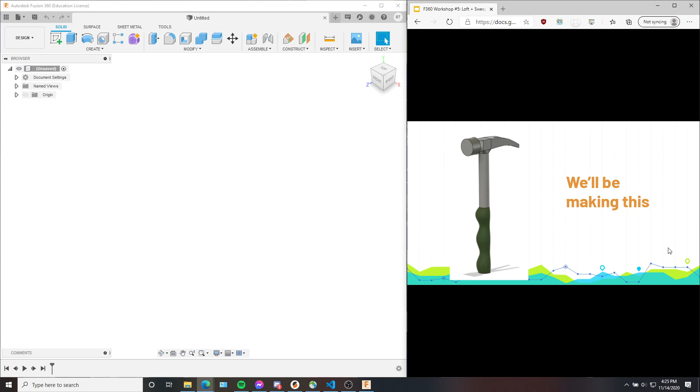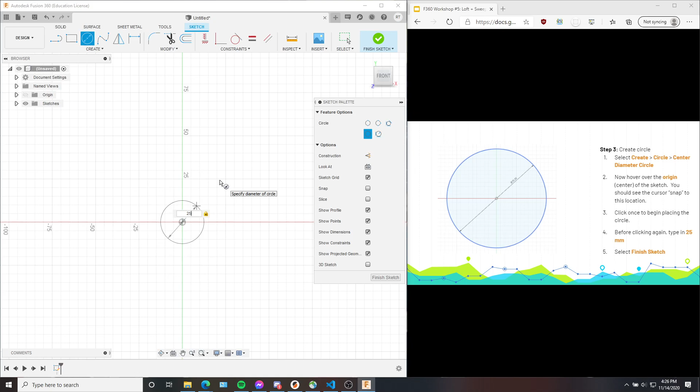Here are the slides. We'll be making this hammer. First we'll create a sketch and put it on the XY plane, then create a 25 millimeter long circle. After that, finish sketch, then extrude and set it to 15 millimeters.

Next we're going to create an offset plane. An offset plane is basically a plane away from a face at a certain distance. We'll click offset plane, click on this back circle profile, extend it by 10 millimeters, and click enter.

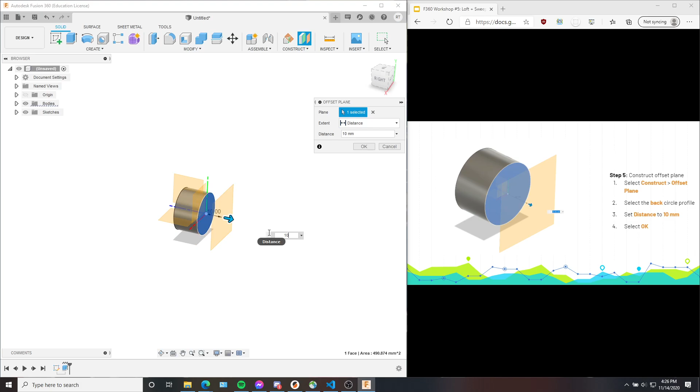Afterwards, we want to draw on this plane, so we do create sketch and click on the plane. This redirects our viewing point so we're drawing on this plane. Now if I zoom in, we'll use create and a rectangle to create a center rectangle, then click on the sketch origin to stretch it out.

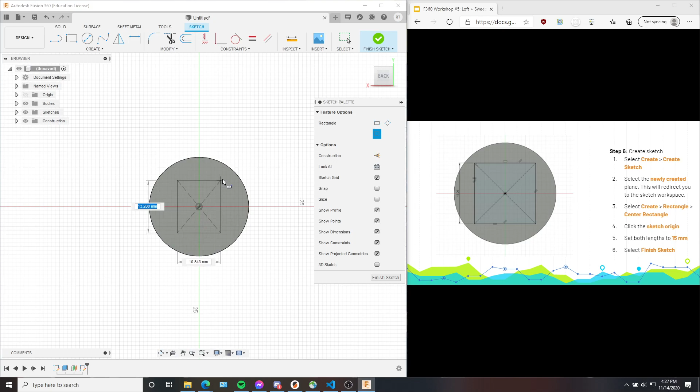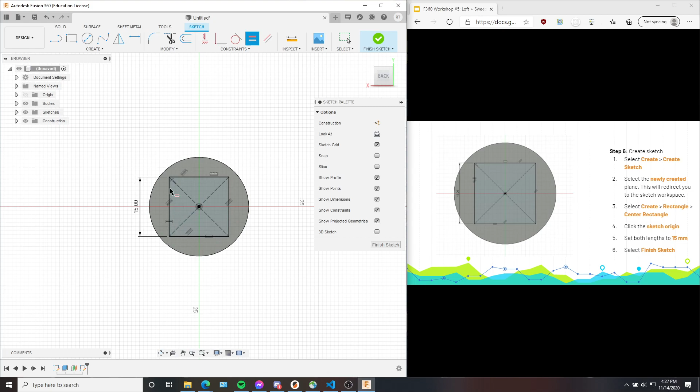We click enter, then relabel these dimensions. This will be 15 millimeters long, and I also want this to be a square, so I'll make this edge and this bottom edge equal. Now it's all constrained, so we can finish sketch.

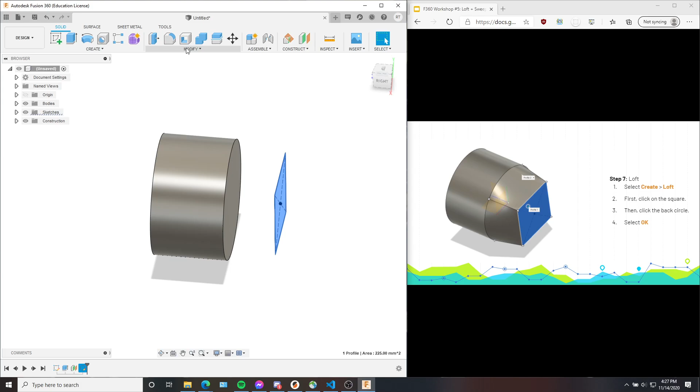Afterwards, we're going to use this new tool called a loft. A loft allows us to merge two profiles together into one surface. It's really useful when you're trying to combine different surfaces into one object smoothly, instead of having this weird riggedness.

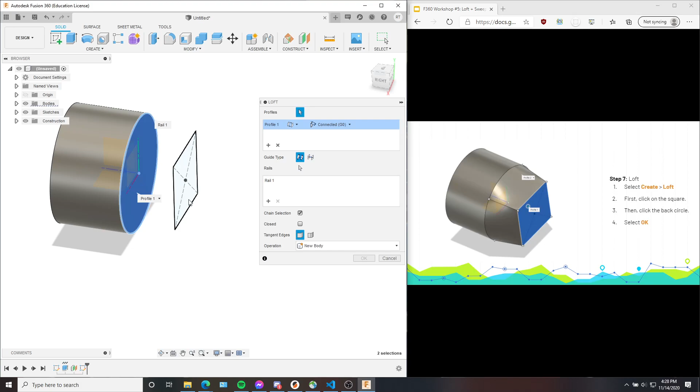So we go to create loft, and the first profile I'll click is the circle, and the second profile I'll click is the square. We do not need rails. So now over here, we have this circle merging into this square, and we don't need to worry about the rails right now.

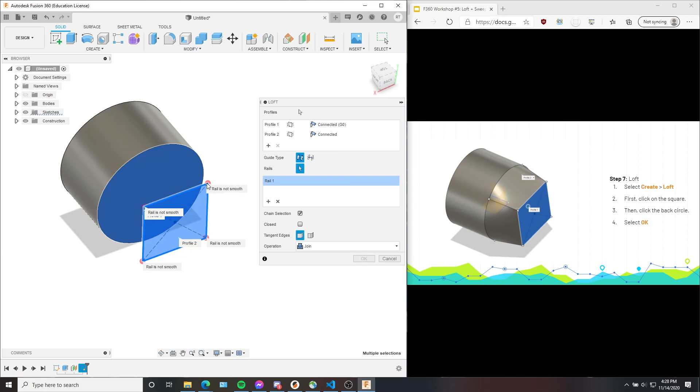Just know that if you did want to change these edges, you can shift these about. Whoops, don't need these. Center. Yeah, you should be able to. Let's just not worry about that right now. But regardless, you can merge two profiles into this one cool surface.

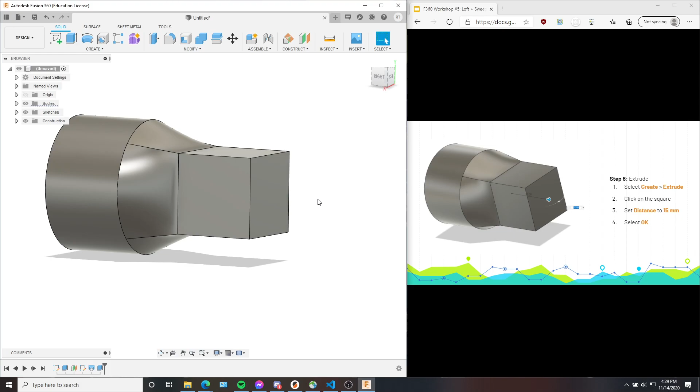Click OK. Now we want to extrude this square edge. We click extrude and do it by 15 millimeters, and we're okay. So now we want to create another offset plane.

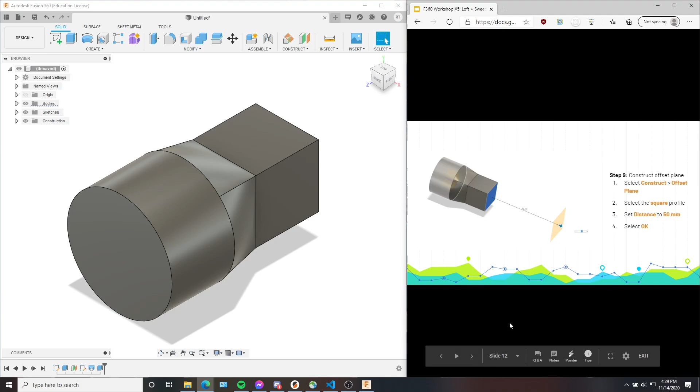This is so that when we're working on the hammer, we can work on this back face and then create a loft. So going back, we do offset plane, click on the back, set the distance to 50 millimeters, click enter. Now we have this plane back here.

Next we want to draw on this plane, so we click create sketch, click on the plane. The way it's oriented right now, I want to look at it from the back, so I'm going to rotate this so it goes to the back, like so.

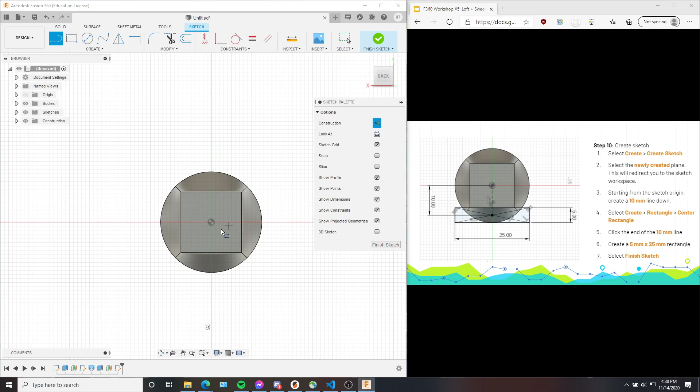Then I want to create a construction line, because this 10 millimeter long line here is not going to be used for any extrusions. So I'll click L, make it 10, click enter.

Now this rectangle profile, I want this to be part of an extrusion, or part of a loft. So if you're going to use it for a feature, you can't have the construction option on, so we're going to turn it off.

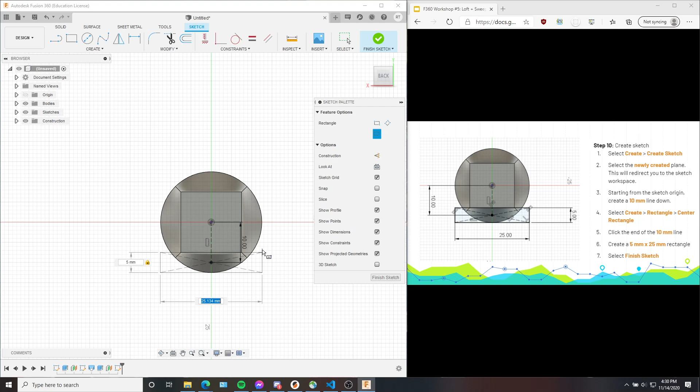Then we're going to create a center rectangle, click over here. Now we're going to set the dimensions: the height to 5 and the width to 25. Click enter, and now we can just do finish sketch.

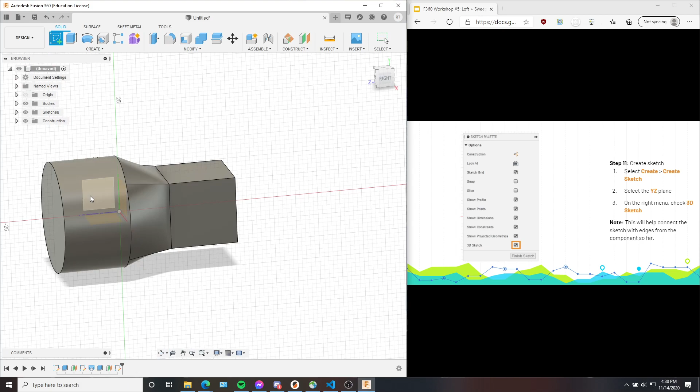Now we're going to create another sketch. To do this, we're going to click create sketch, and then we're going to do it on the YZ plane so that it cuts the hammer in half. So click here.

Next what we're going to do is turn on 3D sketch. The reason why we're turning it on is because we want to be able to use these edges. However, if I try to draw right now, I can show as a demonstration, it doesn't really line up because it doesn't really know that it's there.

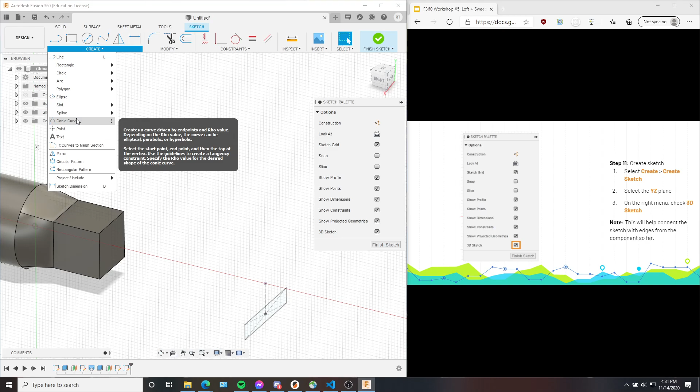So what we're going to do is click 3D sketch, and then use the conic curve, and then I'm going to try to line this up so that it hits the midpoint over here, so it will have like an X.

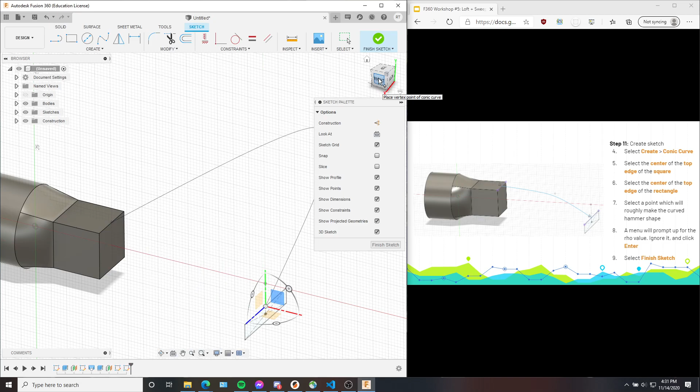Next I'll do it on this rectangle up here on the top edge. And now this part is making a curve, so to make the curve right, I'm going to go back to a correct viewpoint, and then place it roughly around here. There's not really a certain place you have to put this on. As long as it just makes the general hammer shape, you're all good.

Now we can change the rho value. What this does is change the sharpness of this curve. If I make it 99, it's almost just 2 lines, whereas if I make it 1 or 0, it's almost a straight line. I'm going to bring it back to 75, click enter, and now we don't need this 3D sketch anymore, so I'm just going to turn it off, and we can do finish sketch.

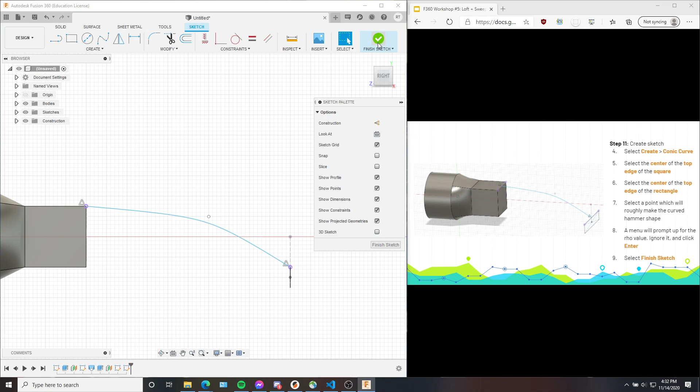Now what we're going to do is create a loft. So we click create and then loft. For the profiles, I'm going to click on this square and this rectangle. Right now you can see the loft it's trying to make is just directly a straight line. We don't necessarily want that.

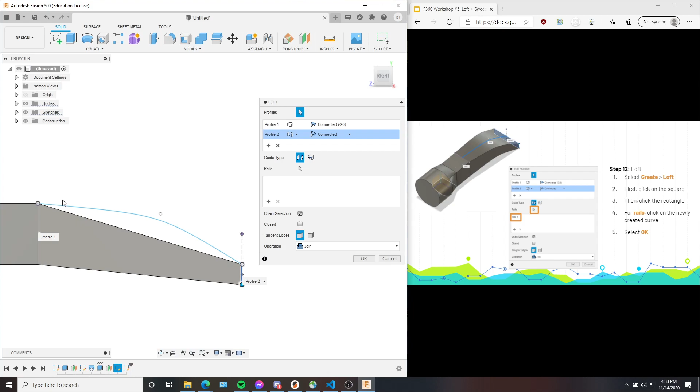We want this to follow this curve shape. So we're going to use this rail, and the rail allows us to guide the loft in a certain direction. So do rail, and then we'll click on the curve, and now it kind of curves around and makes this ideal hammer shape. So we can click OK.

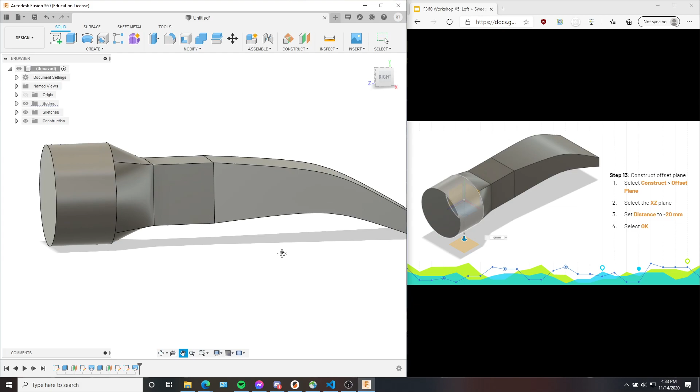And now what we're going to create is... I believe this is the, oh wait, no, I remember. So right now we have this hammer shape, but we don't have the U part up here. So we're going to create a curve and then cut it out, or carve it out, I guess you would say.

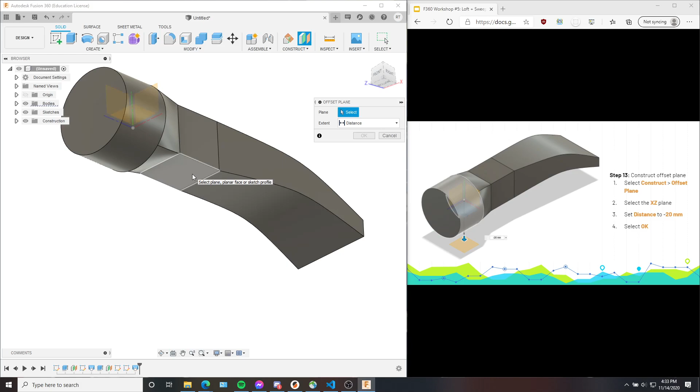First what we're going to do is construct an offset plane, click on this bottom square right here, or sorry, not the bottom square. What am I saying? It should be the XY plane or XZ plane. So it should be this one here. And then we're going to set it down to 20 millimeters.

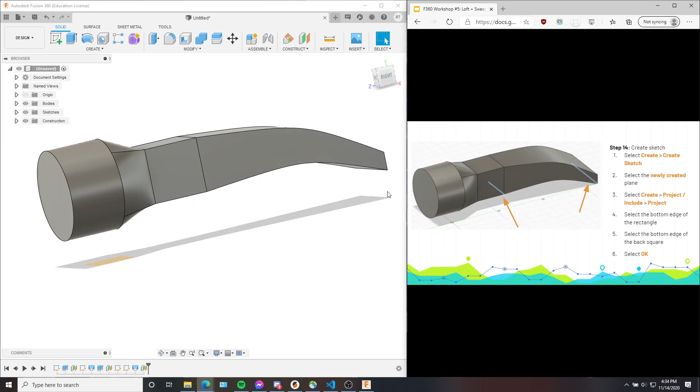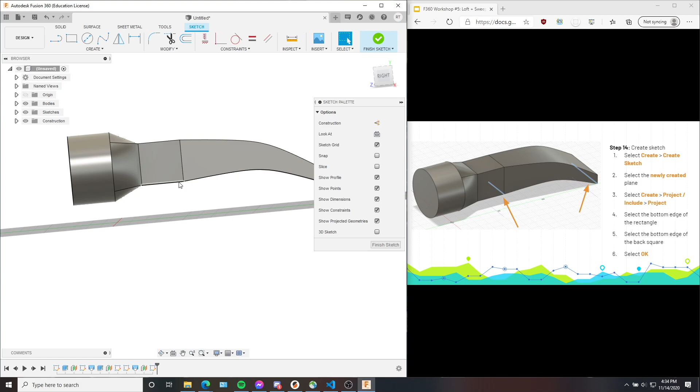Next, what we're going to do is create a sketch. And I'm going to rotate my viewpoint. Now what we want to do is, so if you look carefully, you can see the head is floating on top of the sketch. But that also means we can't interact with any of the edges because they're not intersecting.

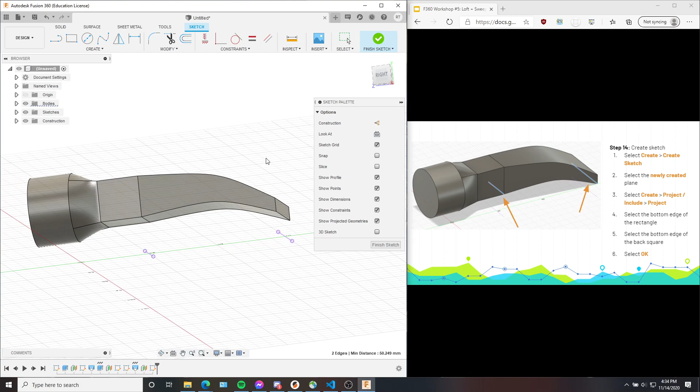So what we can do is go to create and then project. This allows us to project these edges onto our sketch plane. So for here, I want to project this line and also this line. And then I can click OK. So now if you look at the sketch, we have these 2 lines, and they perfectly match up with the hammer ones over here. So it makes it really convenient.

Right now we don't really need the body for drawing, so I'm going to turn it off. And then going back to top view, we're going to be creating the curve shape.

First, what we're going to do is create 2 lines from the endpoint of these, just for a reference. Okay, going back, these are reference lines, so I'm going to turn construction on.

At the endpoint, I want this to be 5 millimeters long, and then I'm going to create another line and set the equals constraint so that if I ever want to go back and change my settings, I only have to change this value.

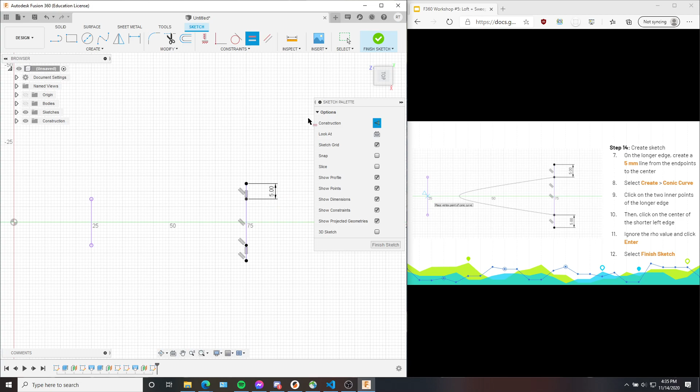Next, I'm going to create a conic curve. Click on these two inner points, and then drag my cursor all the way to the center of this other edge. We can leave this value as is, and click enter.

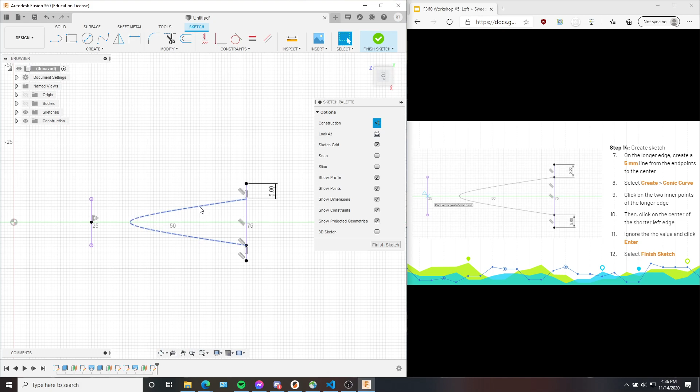As you can see, I forgot to turn off the construction option, so I can click it and turn it off here. Now we have this kind of triangle curved U shape. So we can finish sketch and turn back on our bodies.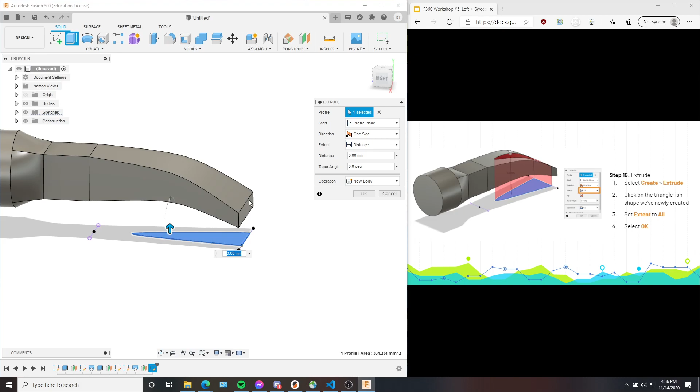Now we can create an extrusion cut. We'll do extrude, drag this up a little bit, and change the extent to all. Now it perfectly cuts all of this. I click OK, and now we have that U part for the nails.

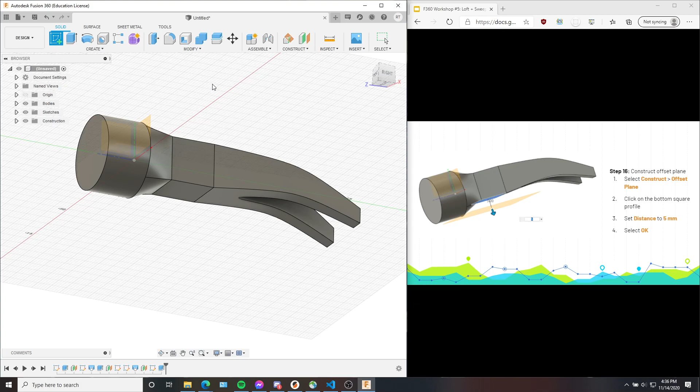Now what we want to do is create the handle. First I'm going to do offset plane, click on the bottom here, and set the distance to 5 millimeters.

Afterwards, I'm going to create a sketch on here. Click the plane, and then draw a 15 millimeter wide circle. Click the center diameter circle, click the sketch origin, and change it to 15. Click enter, then finish sketch.

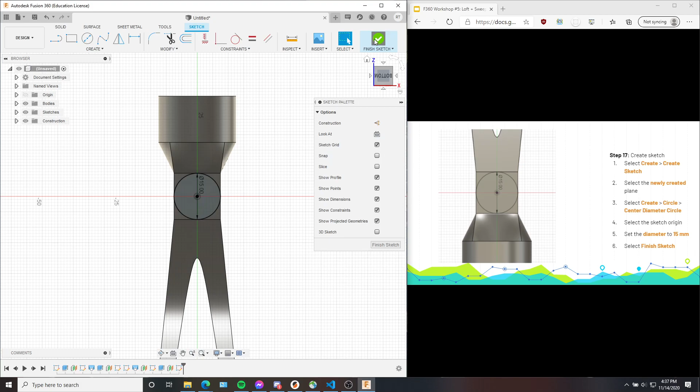Now what I want to do is create another loft. I go to create, then loft. I can click on this square and this circle right here, and then click OK.

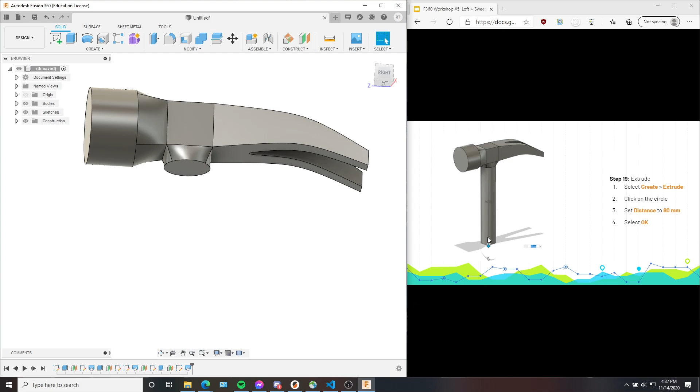Now what I want to do is create the bar piece. I'll click extrude, click the circle, and then set the distance to 80.

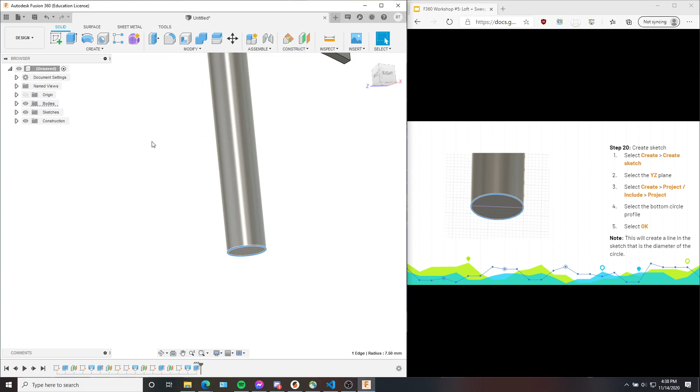Now I want to reference this circle, specifically its diameter. First I'll create a sketch, click on this YZ plane, orbit a bit, and do create project, then click on the circle and click OK. Now we have the diameter line here. Go back to the right viewpoint.

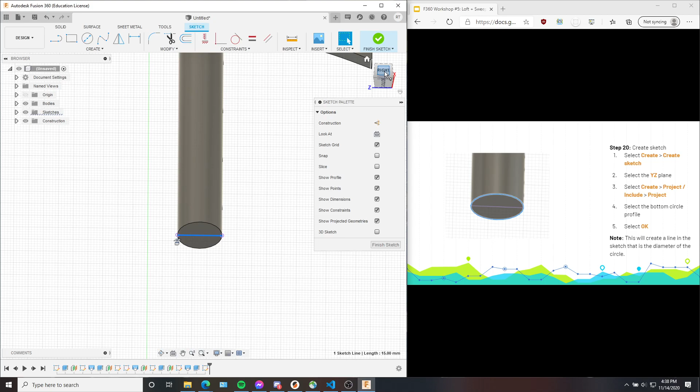Now what we want to do is create two lines. The first line we'll be creating is this 100 millimeter long line. This will be our path, telling us how long our feature is going to be. In this case, we want it to be 100 millimeters long.

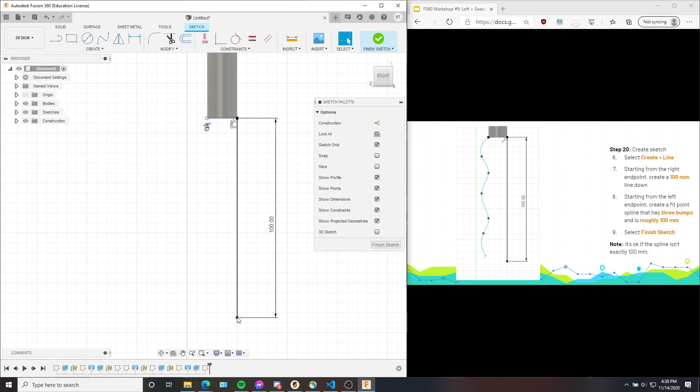The second part is going to be like a guide rail, and this just helps us create a curved surface. We're just going to create 3 bumps. They don't have to be exact, and they don't have to be exactly 100 millimeters long either. I'm going to move this around. It's okay if it's a little bit longer, it doesn't really matter because it's going to cut off right here anyways. So I think this is good.

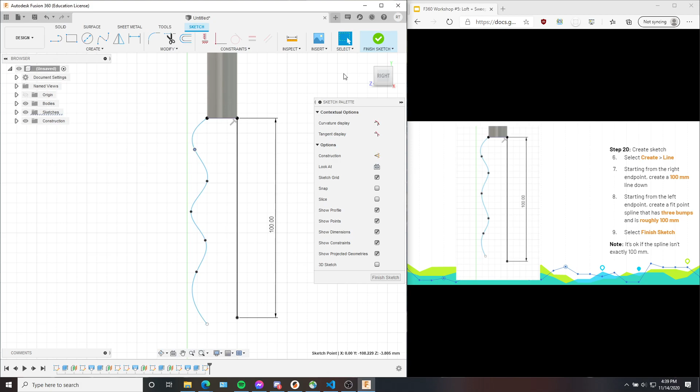I'll do finish sketch, and now we're going to use the sweep tool. If I hover over it, you can see there's a circular profile, and it just follows the path given. So that's what we're going to do here.

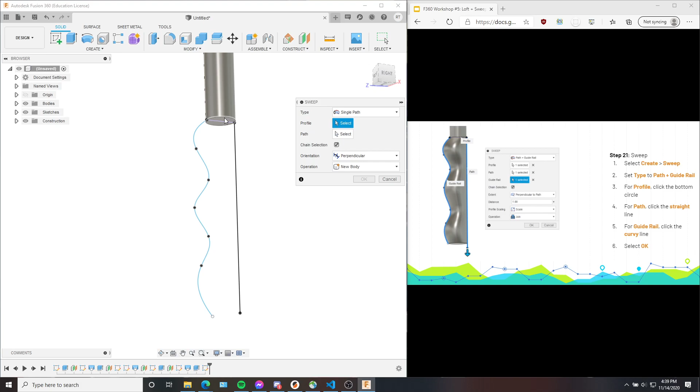We're going to use sweep. Our profile is going to be the circle, and if I just chose the path as the straight line, it's pretty much the same as an extrusion. That's what extrusion basically is, it only follows a linear line.

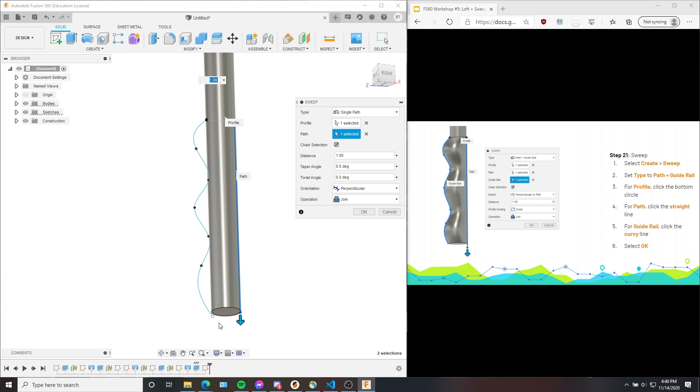But since I want this to copy this shape too, I can change this path to a path plus a guide rail. Now if I click on the curved line for the guide rail, it creates this wavy grip texture. If you look carefully at the bottom, you can see it kind of cuts right here, even though the spline ends a bit further down. That's because of the path.

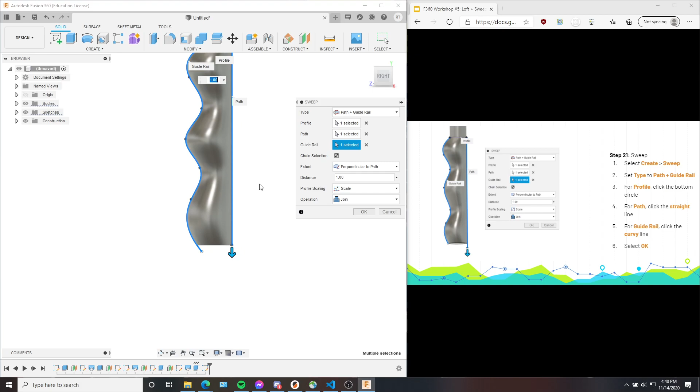Anyways, since we have this grip, we can click OK, and there you go. Now we have our hammer, and I hope you learned about how to use lofts and sweeps. We'll see you next week.